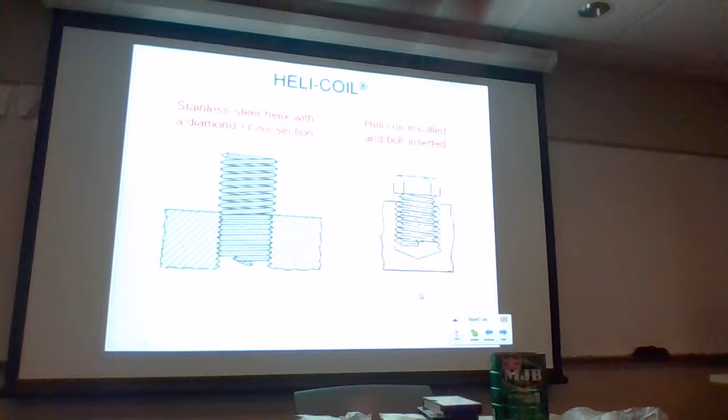Here's one that's being threaded into position, so you can see the installation of it. You're going to have a hole, but the hole is going to have to be drilled first with a special drill, and then also tapped with a special tap that's supplied in the kit.

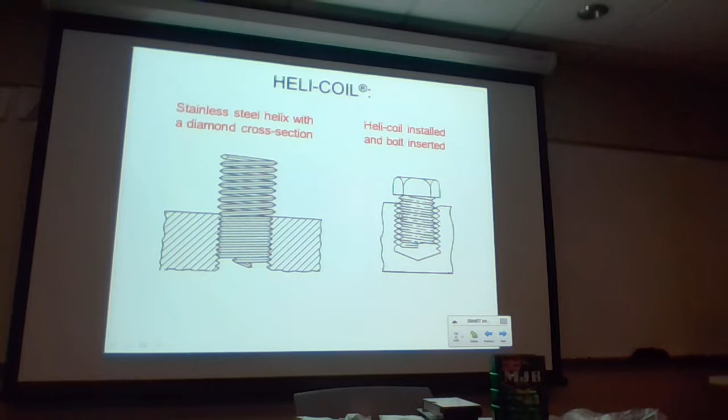The installation tool, what it does is it catches the bottom of the tang, and as you turn it into the threaded hole, eventually the drive tang kind of breaks away. So again, you kind of have to be concerned where the tang is going to go. And then when the bolt or the screw is installed, that engages the inside portion of the diamond cross section of it in order to kind of retain it. So that's how it works.

You have to follow the instructions kind of carefully when you install them. You have to cut threads. You're going to have to gauge the hole. They've got a special type of tool that gauges the hole for depth. And then you usually have to use a tool that will catch the bottom of the tang of the helicoil in order to thread it in position. But not too bad to do. Okay, so that's what I can tell you about helicoils.

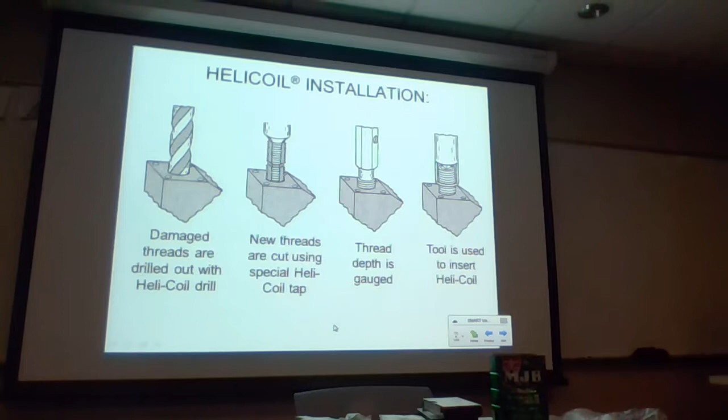Next, I think I briefly mentioned these in class. These are the oops rivets. They're identified as NAS 1097 rivets. I've classified them as special because they're not commonly used in aircraft construction except for maybe one manufacturer. Grumman aircraft and some versions of Grumman use the 1097 rivets for installation of thin skins.

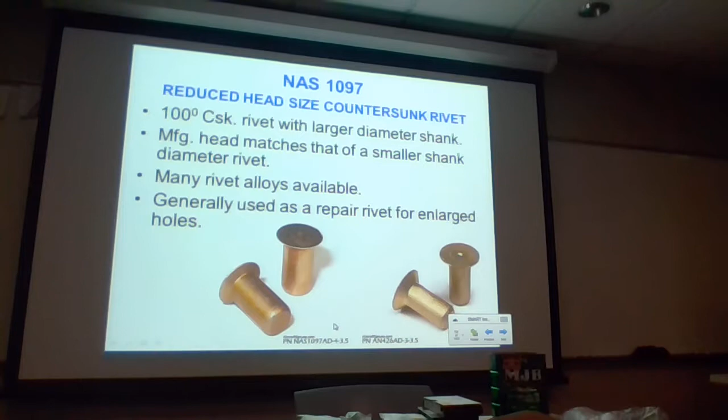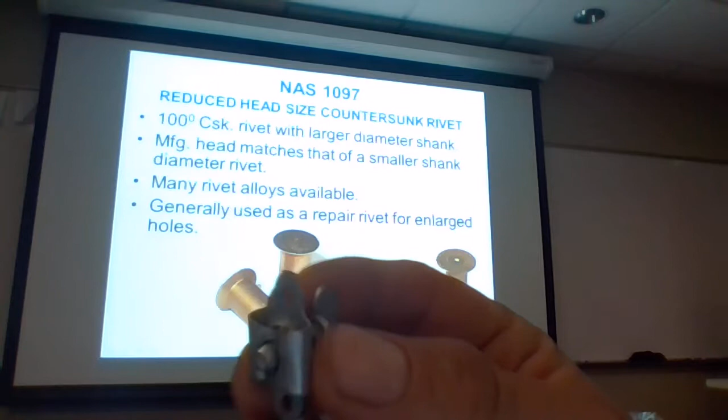What does this rivet do for you? Well, it allows you to kind of hide a mistake. If, for example, you drilled a hole and the hole is now too big to install the same diameter rivet, cosmetically it gives you a head that will match the other rivets in that installation. So, for example, if I'm installing number 3 rivets and I bugger up one of the holes, I don't want to go and get a number 4 rivet, because after installation it's obvious that one of the rivets is a little bit bigger than the others.

What they'll do to kind of hide their sins is use a 1097 rivet. What it gives you is a shank size that is one nominal size larger, but a smaller head diameter that matches the others. So they call these reduced head countersunk rivets. You all kind of follow what it does? So again, it's used sometimes cosmetically for that reason. However, I will tell you this as well.

Sometimes manufacturers have to countersink very thin skins. Grumman is a good example. On some of their aircraft, they're using maybe .025 thick skin material, which would be too thin to countersink with a standard countersink cutter, using the same type of rules that they use with rivets. So they use a NAS 1097, which gives you a thinner head adaptable to thin material, and they're still using a rather generous shank diameter. So that would be one example where they're used not for cosmetic reasons, but as part of the primary structure intentionally.

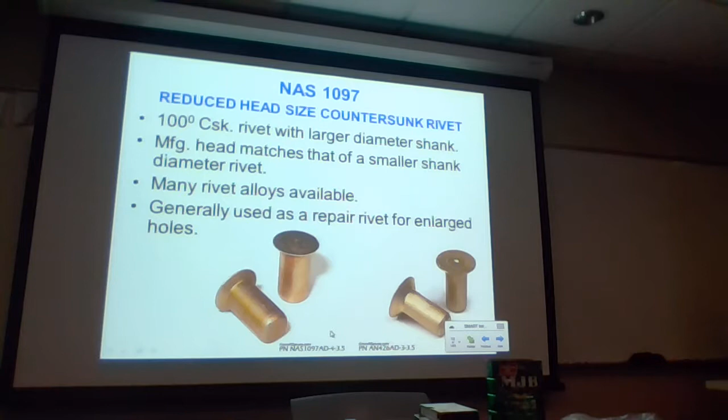Sometimes some of the RV builders prefer to use these for attachment of nut plates. The recess that you find in nut plates sometimes doesn't look very aesthetically appealing if they use a standard number 4 rivet. So the recess that's in the receptacle of a nut plate fits the depression that you'd find in some of the 1097 rivets, and they might use it for that particular reason.

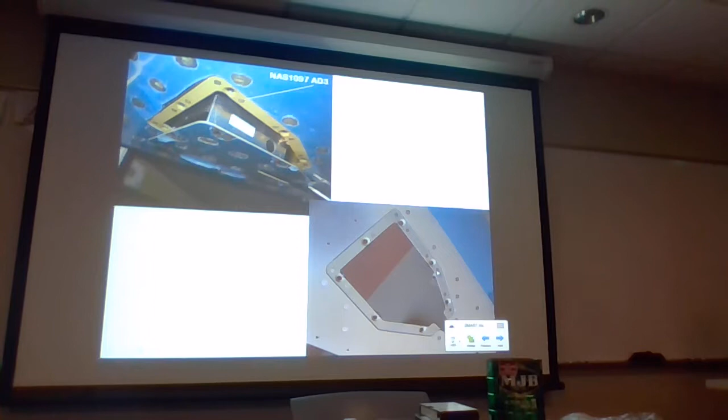It's really cosmetic from that standpoint, but something like this, where they've got maybe a nut plate on the backside of the material where this cover is going to go. If they were to install a standard flush rivet, it just doesn't match the contour very well, so the NAS rivets work really well for that type of installation. To give you an idea of a comparison of the rivets, here's an example.

Here's an AN426 AD3 rivet, and this one would have a shank diameter of 3/32 of an inch. And if we were going to have an NAS counterpart for it, it would probably have something that kind of looks like this. So the shank diameter of this is going to be 3/32 of an inch, but the head is actually going to be a little bit smaller.

Comparison of something like this. This is a 1097 AD4. This would have a shank diameter of an eighth of an inch. But look at the heads of these. The heads of these are almost identical. So again, what you've got is a head with pretty much the same profile, but the shank diameter of this thing is just a little bit bigger. It'll never be noticed externally, but the heads are almost identical for them.

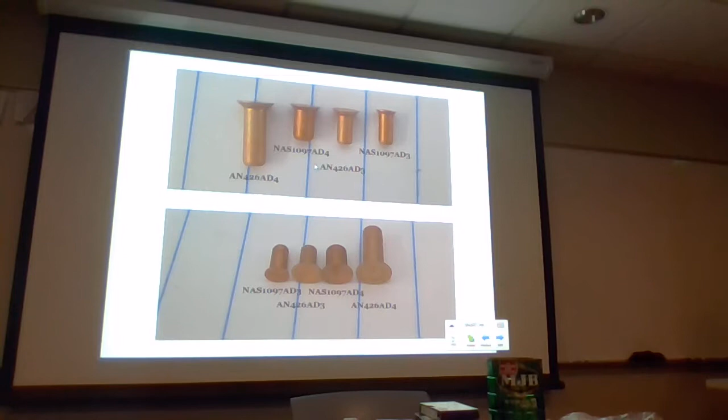So there is somewhat of a convex head on a lot of the 1097s. So sometimes if the countersunk depression has been damaged a little bit, when it mates with like a flush gun set, it tends to flow into the area that's been damaged as well. So it's maybe a little bit of an advantage from that standpoint too. They're generally only available in countersunk heads. They don't make protruding head versions of these rivets. Okay. So that's what we have.

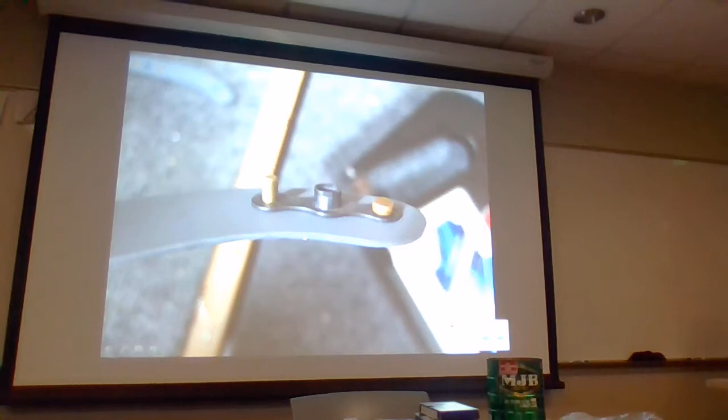So here's an example of one that's used for a nut plate. You can't see the backside of it where the dimple or the countersunk depression is at. But again, sometimes they work really well for installing nut plates because cosmetically they fit the depression really well on the other side.

There's another variety of flush rivet, or I should say oversized rivets, but it works a little bit differently. What it does for you is it gives you a shank diameter that's ever so slightly large by an increment of a 64th of an inch. These are called NAS1241s and 1242s. They do make these in countersunk styles of heads and also universal, but they don't call them reduced head style. It just gives you a shank diameter that's larger by a 64th of an inch.

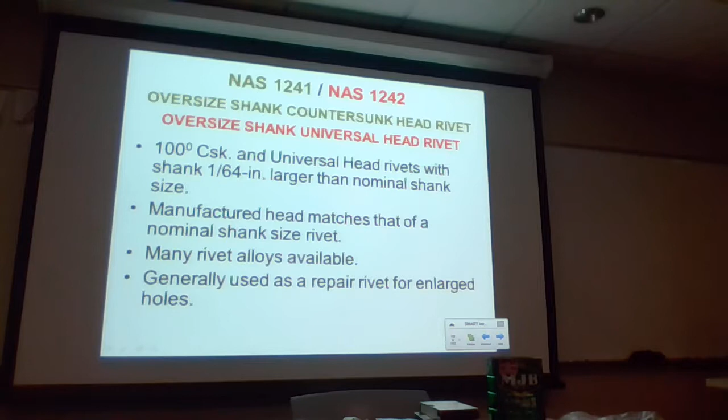These require specialty drills to install. They're probably more useful if you have to do repair work where you're trying not to exceed edge distance or pitch limits in structure, if you've got minimum pitch or minimum edge distance. So, for example, a number 3 rivet, in this case, is not going to have a 3/32 shank diameter. It's got a shank diameter of 7/64 of an inch, and because of that, it's going to require a finish size drill that's going to be a number 33 drill.

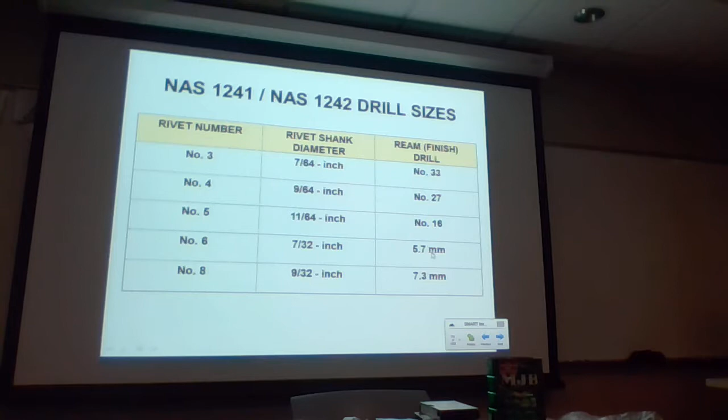Same thing with a number 6 rivet. For a nominal size number 6 rivet, this would be 3/16 shank diameter, but instead it's larger by a 32nd of an inch, so it's 7/32. You're going to have to use a metric drill, or at least a drill that's sized at 5.7 millimeters, in order to install it. So it doesn't use increments that are standard for the oversize. You have to actually have a special drill in order to install them. So that's what I could tell you.

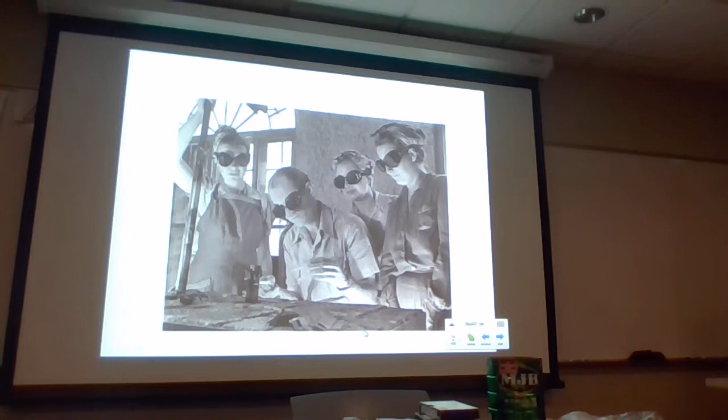Right. Questions so far on these types of fasteners?

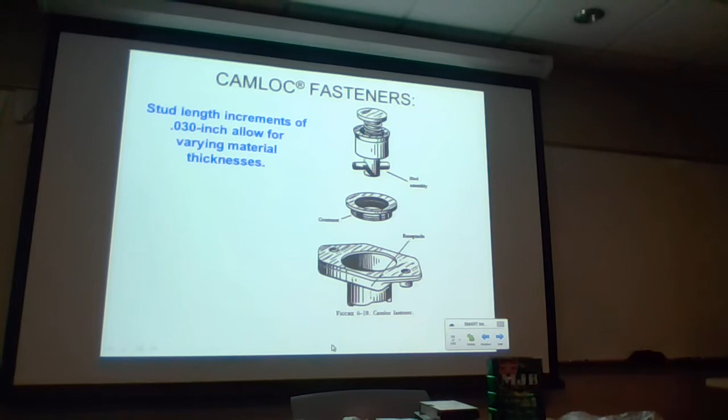You've got your test next week. Would you like me to spend a little bit of time on your... Yes, please. Yep. All right. Next week? Yeah, so, next...